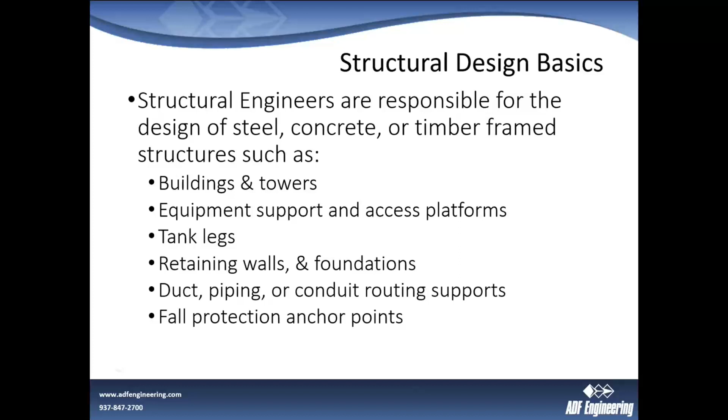So when we start a project, the first thing we really need to do is determine what kind of load we're going to be dealing with and how much. A lot of the projects we do, and a lot of the stuff we see on sites, is related to a process upgrade. So we will have a lot of ideas of what the equipment needs to be, what the changes need to be done there, and we will have to look at it in terms of what does all this weigh, how much space is this going to take up.

And that kind of sets our structural basis for design. So we look at things like what building code we're dealing with. We look at the site-specific information, such as the geological stuff, if we have foundations in question, and we'll look at what the existing buildings are, if there are any. I'll kind of touch on that more later. And then sometimes there's stuff like cost schedule restrictions we run into a lot, and even some limitations on height, and depending on the area the building is in, there can be other things there.

So we have to take that into account, and then we'll generate that preliminary design. A lot of times that goes through gate reviews or costing phases, and then while we're receiving the final equipment information, and once that all comes in and those layouts are approved, we'll finalize that design and issue it.

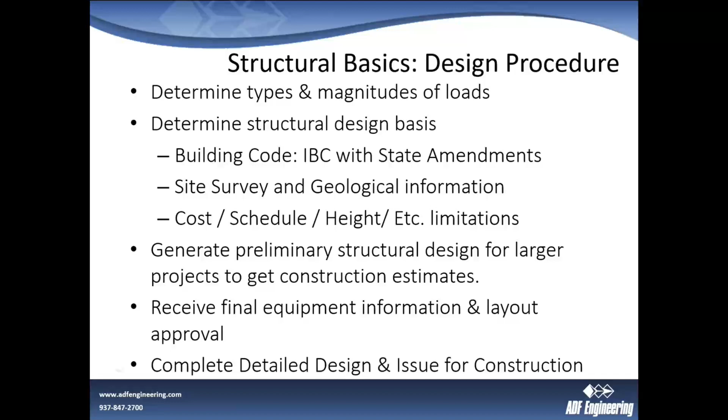We're going into the meat of the presentation today. I'm going to be covering a lot about terminology and how that affects or comes into play with drawings, and what a lot of these words you hear when talking to a structural engineer might not quite make sense, or you might not fully understand what they're referring to. We'll try to cover all that.

When we talk about a load and what we're trying to support with the structure, there's different types. Dead load is our most common. That's the weight of the structure itself, and any permanent weight that's going to be in that structure, such as equipment, or any kind of heavy furniture, or anything that's not transient. Live loading is the second most common, and that is the weight of people, storage, product weight inside of buildings.

So those are the loads that kind of come and go. You might have one person walking around, you might have 50, but we make an assumption based on a lot of codes for what we're designing each thing for. It depends on what the structure is specifically, and we'll look at that in a bit on what we assume that live load is.

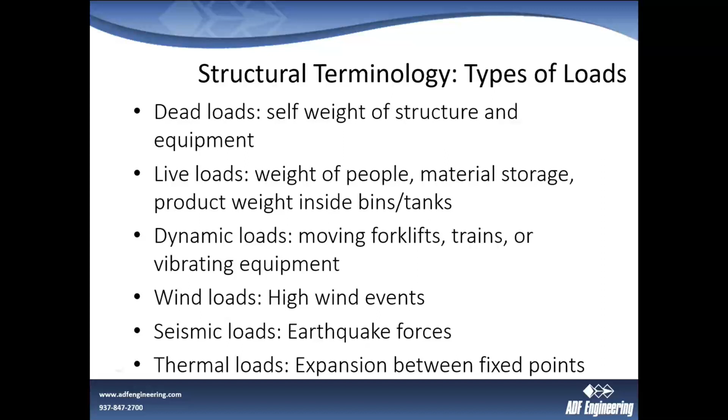And then the last one is thermal loading, and a lot of this is if we have a big piece of equipment or piping that has a big thermal temperature change, they can expand, and if we aren't careful with our supports of those pieces, the expansion can do damage to itself or to the structure surrounding it. So we try to leave those changes or that thermal growth free to move.

So how do these loads show up on the drawing? Usually you're going to see them in one of two ways. On the cover page, there's going to be a design data kind of information dump, as it were. You see here, this is an example of one of our projects. We provide both the live load. What is that? It differs depending on what area you're in.

A lot of times this will be required by ASCE 7-10 or 7-16 or whatever year version that is. Most industrial floors are somewhere between 60 PSF for a catwalk, walkway, or a light floor. 100 pounds per square foot is common, all the way up to maybe 200 if it's being used for storage. Roofs are much lighter, and ground floor is heavier, usually like a slab. This information is important both when you're looking at and trying to think about making changes to a structure, or if you're having another project come in, you want to make sure you keep that information.

One of the things I'm going to be bringing up quite often in this presentation is that we don't see very often people keeping their structural drawings. So you have a plant that's built, and a lot of times they'll keep maybe the general arrangement equipment layouts, but they might not keep the structural drawings. Those are always going to be helpful, not only for the structural engineer coming in to look at any modifications, but also for engineers working on site to understand what the structure was designed for and what the intents and purposes were.

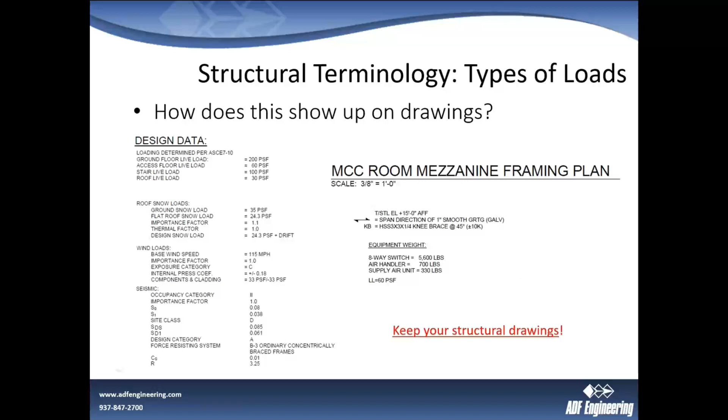Also shown is the equipment weight in a particular view. If you have a platform supporting several pieces of equipment, it's nice to have that information there. That way, if an upgrade is occurring and we know the weight of the new equipment, or maybe we don't know the weight of the old, we can at least know what was assumed for the design of the floor. If the new equipment is significantly heavier, we know we should have a structural engineer come evaluate that.

When we get into these drawings, we have different types of views, and it's not always clear what they mean. The first is a plan view, the most common type. It's a top-down view from above showing all the horizontal framing. A lot of times we'll also include equipment locations and floor openings. It looks something like this as an example.

You'll see column lines as a reference in the building running north to south and left to right. Usually north is up in these views, but not necessarily. You'll have both orthogonal directions with column lines shown, and those serve as a good reference point for contractors to find where things are supposed to go.

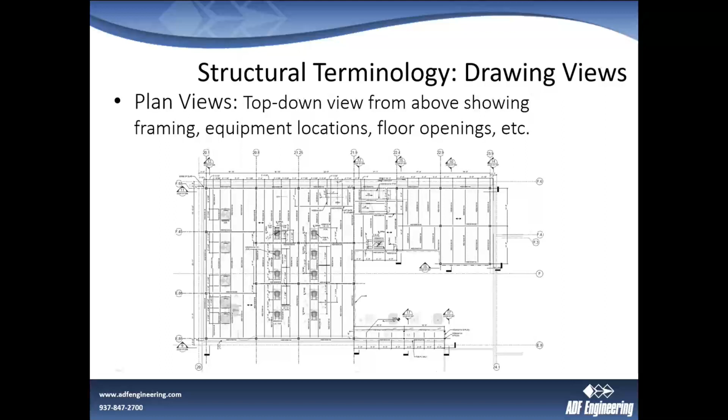We also have elevation or section views, which are similar — a side view showing additional information. Here we have elevation views, although they're called out as sections, but this is more of an elevation view showing a partial to full view of the entire structure height. So for a full building, the elevation view is like standing outside looking at one wall, showing what you would see.

A section view is usually a smaller cut. This one was an indoor platform, so it's just a section cut — a side view, generally taken from a plan view, that gives more frame of reference by providing a secondary look at an object we're trying to show on a drawing.

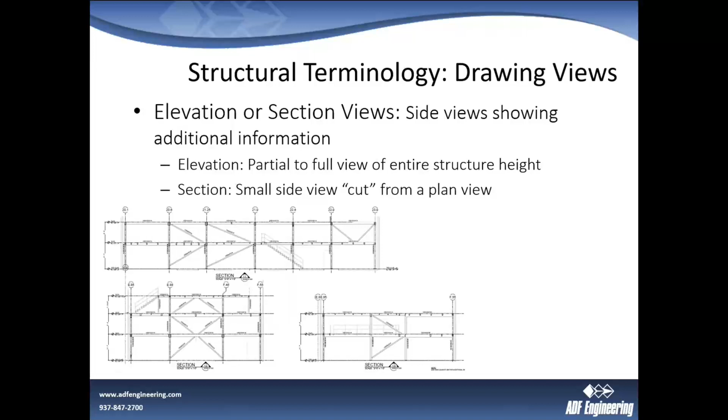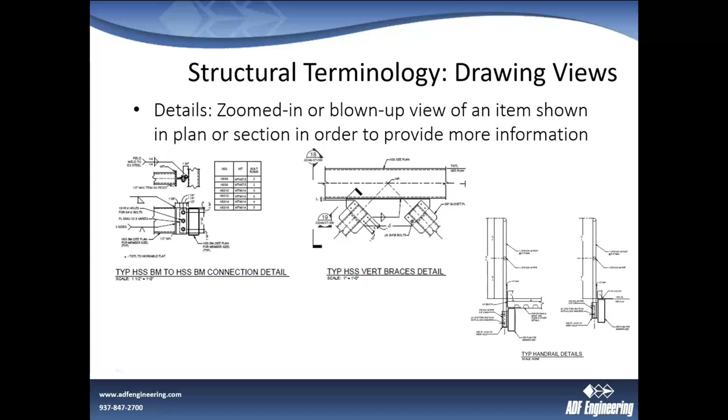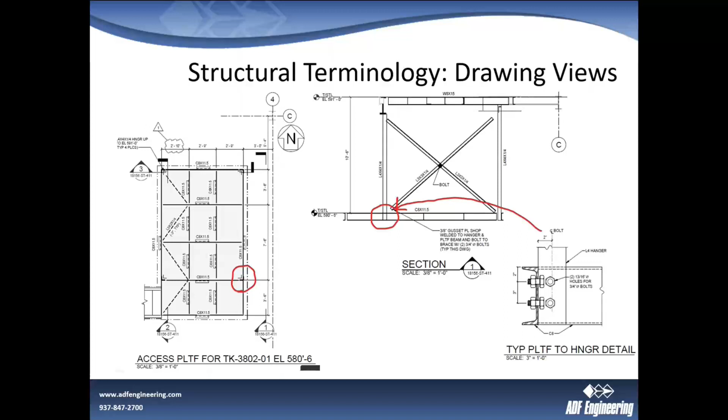It all ties together, and there are often references on these drawings. You can see the call-outs for a section — if it's not on the same page, the number matches to a section view number, and the drawing number where that section can be found is usually shown on the detail. Here it's sheet 411, and in this case both views are on the same sheet, so they were referenced together.

Now we get into kind of terminology with steel and the shapes that those are. A lot of people, and we hear it, always say I-beams, and that's a common way to call it, because they do in fact look like I's, the most common ones you see.

But in reality, the way those are designated are usually W shapes. The W stands for wide flange shape, the flange being the top and bottom horizontal sections, and the vertical piece is what we call the web. So you can see here there's a couple different I shapes shown - there's W's, S's you might see sometimes too, and a couple other ones called H's that are used for steel piles and things like that.

The rest of the shapes are a little bit more intuitive. A C shape is a channel shape and looks like a C. An angle is designated with an L, and it looks like an L. WT is a T shape, or ST - those are made from cutting a W or an S shape in half and getting the T shape from that. And then you have pipe sections - there's process pipe, but there's also structural pipe shapes, square HSS tubing or rectangular, and then bars and plates.

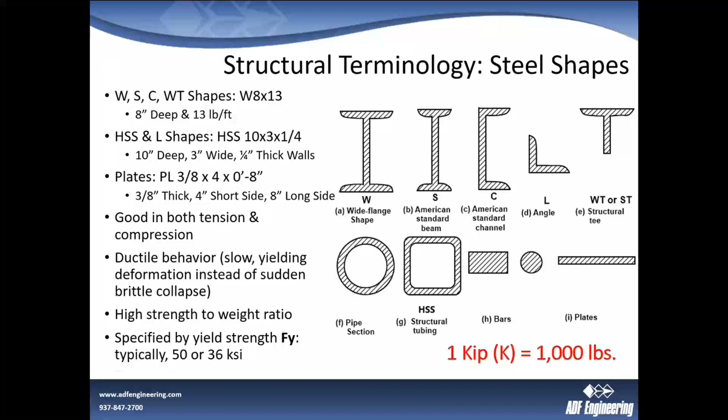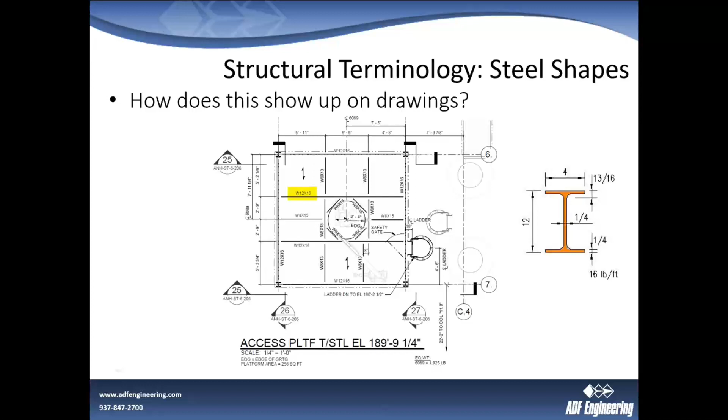And we know that a 12 by 16 has a 4-inch flange and a wide flange, and a quarter-inch thick web and flange, so we can measure those up and be able to identify this. But again, it's always better, if it's an existing beam, to have the drawing so we're sure.

Concrete is another one, obviously, that we're using quite a bit. A lot of people too sometimes don't understand the difference between cement and concrete. Cement is an ingredient in concrete. Concrete is made up of cement, an aggregate such as rock - typically rock and sand - and then water. So those ingredients make up concrete. Cement on its own is just a powder.

When you add all those together, you actually get a chemical reaction. Cement or concrete doesn't dry, technically, it hardens. So it keeps hardening for quite a long time, mostly up to about 28 days. It's very strong in compression.

Usually, when you see concrete specified on drawings, it's by its strength, called F prime C, and that's mostly between 2,500 and 5,000 psi. So you'll see that concrete is weak in...

The problem with concrete is that it's very strong in compression but very weak in tension. So to counteract this, we introduce rebar, steel rebar, which we know is very strong in tension as well. That helps provide strength to the concrete members in the tension areas. We put it in there and it keeps everything locked together. We put enough reinforcement to keep the concrete from cracking and also to resist any kind of bending.

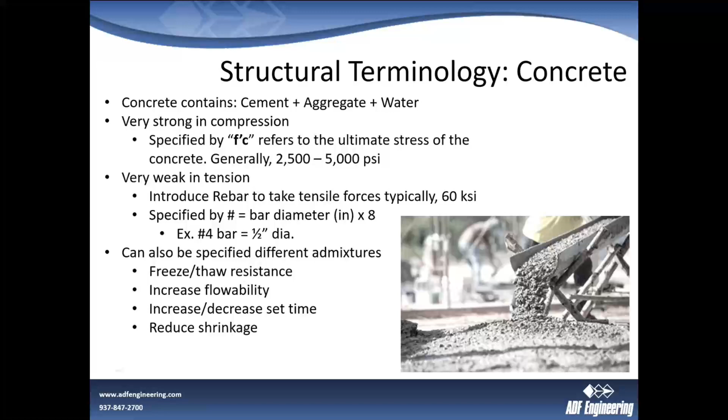We'll send you guys out an abbreviations list for the drawings too - I think that'll be helpful, at the end or in an email later, to explain a lot of these abbreviations you see. But EW is each way, T and B is top and bottom. So you have number 5 bars going at 12-inch spacing each direction, in both the top part of the slab and the bottom part of the slab. That's what that's telling you.

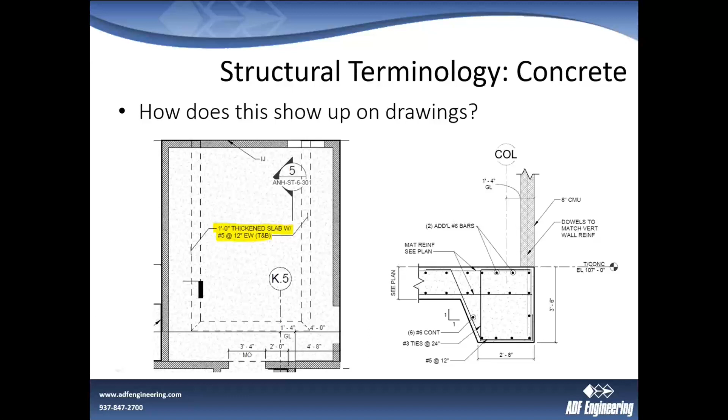So for this first one, going over what we talked about: an operator standing on an elevated platform would be considered as what kind of loading? Dead, live, seismic, or dynamic? I'll give you a beat to think about that one. So that's going to be a live load, right? That's not a permanent load - that person's not there all the time. So we would consider them as a live load, and they're working.

So once we have all these materials that we use, the steel and the concrete, now we have to figure out the load path. We talked about how do we design for these loads that we're going to be looking at, and how do we get them through the structure and essentially into the ground. A lot of the terminology that people use here, hopefully this slide helps clear up.

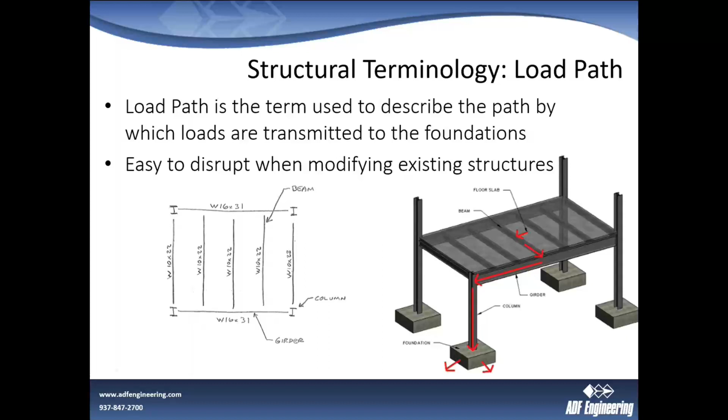The other loads that we're dealing with, besides the vertical loads, is the lateral loads we talked about as far as wind and seismic going. So we have what we call bracing that provides that stability. This limits the drift. So it's not just active loading, it's also preventing the building from racking.

You think of, if you have all pinned connections in the building, it swings side to side, nobody wants that. So it's not just a strength issue, it's also what we call a serviceability issue. If you're on the top floor of a large tower and it sways quite a bit, that's obviously going to be very uncomfortable for the worker, and we want to try to avoid that. So there's a couple different ways we can do bracing.

That's probably what you'll see most in plants. Kind of depending on what equipment or what use through that bay is needed, we'll adjust our bracing accordingly. If there is nothing going through there, we got lots of room, we'll put in an X brace, which is probably the most economical. This is because each of the two diagonals only takes tension, so you don't have to worry about it buckling at a long length.

Think of it like when you see pre-engineered metal buildings. Sometimes you see cables being used in this way. It's like a rope. It's very good in tension, but in compression, it'll just fold in on itself. But this allows you to use much smaller sections of bracing. Unfortunately, it's one of those situations where if you want to come in later and remove one, you can't just remove one and leave the other, because the other one won't be able to take the load from the other direction if the wind were to reverse.

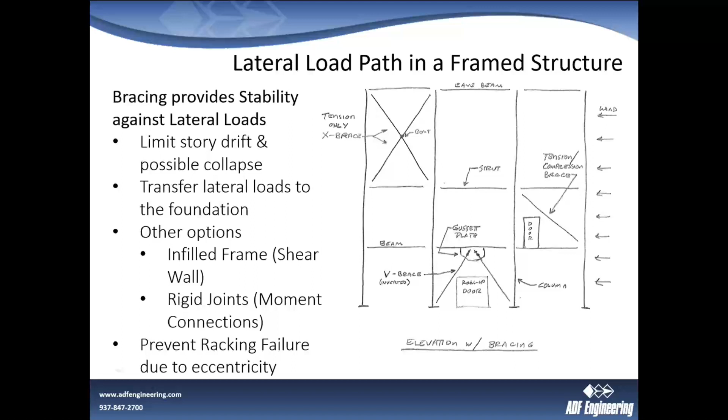So once we get through the steel structure, we come into the foundations. The foundations are the underlying portion of the structure that's supporting the building, transferring those loads to the underneath. For these, we always rely on the information provided by the geotech, the soil boring. So that's why a lot of times if you're dealing with structural engineers, we'll ask if there's a soils report on the site.

And that way we can know if we don't have one. We always like to get one, and we can always help with that too, kind of identifying for the geotech what we need and what we're planning on doing design-wise. That gives them a lot of help on being able to recommend what design values that we should be using.

If it's pretty good soil, we'll be able to do a shallow footing. Spread footings are just square footings that spread the load out from a single column, or a mat foundation which may have multiple columns, or a piece of equipment like a tank, and that just sits fairly shallow in the earth, and nothing more is needed.

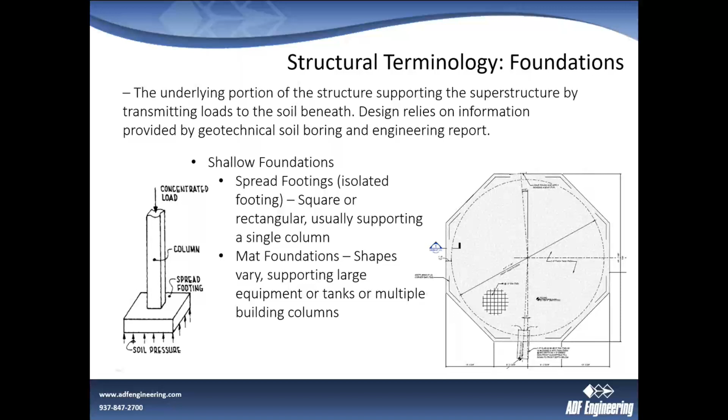Deep foundations, we're going to have piles that go deeper to either better soil or potentially even bedrock. We usually have to use those if the top couple, 10 or 12 feet of soil out there is, according to the geotech, very low strength.

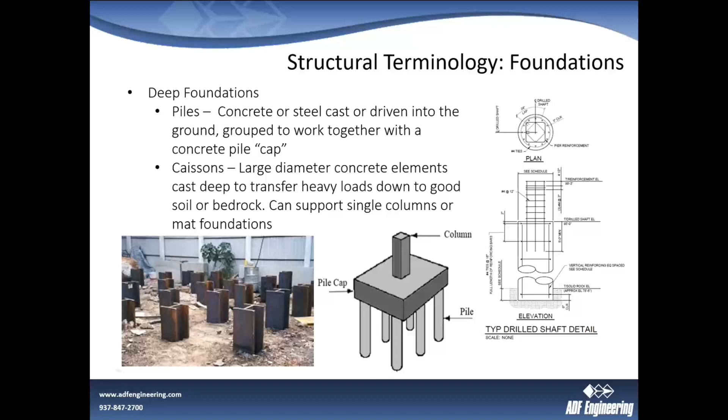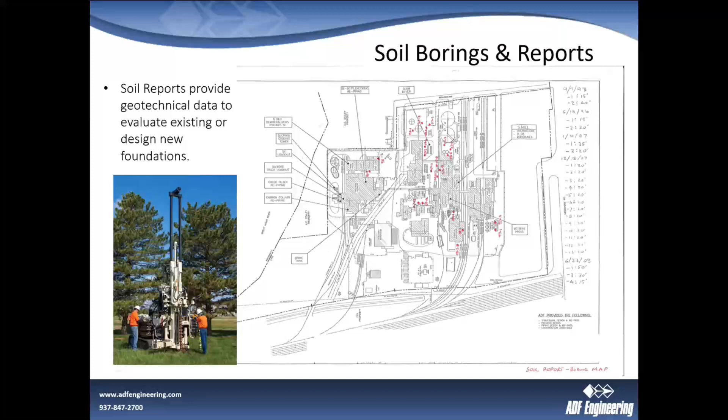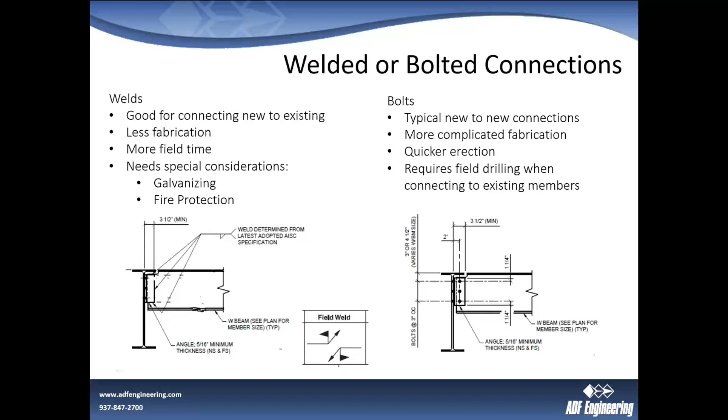I think it'd be helpful for you guys, when looking at these drawings, if you see that symbol and know that field welding is going to be a problem, to talk to your engineer sooner rather than later and maybe try to come up with a bolted alternative.

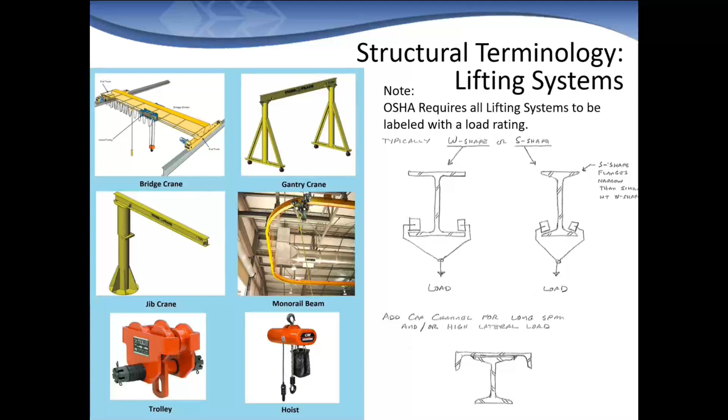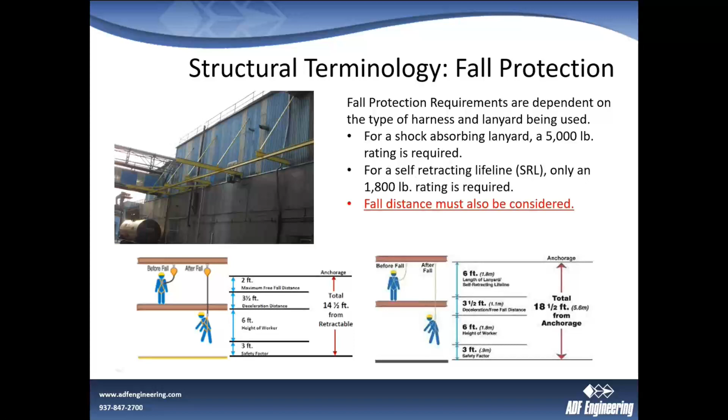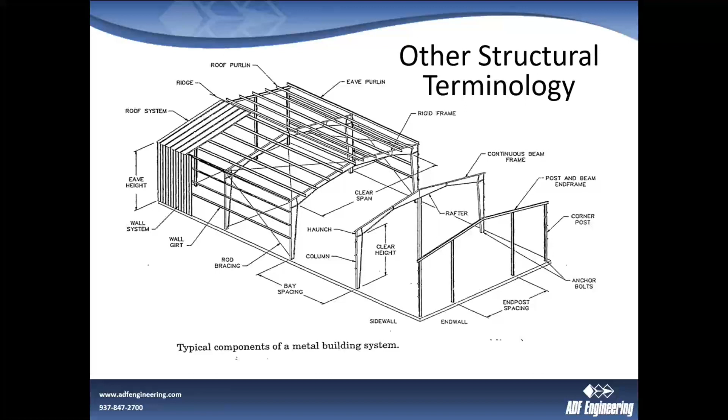All right, so a quick quiz. It's okay to remove one brace of an X brace configuration if the other side is still able to be left in place. So think about that one.

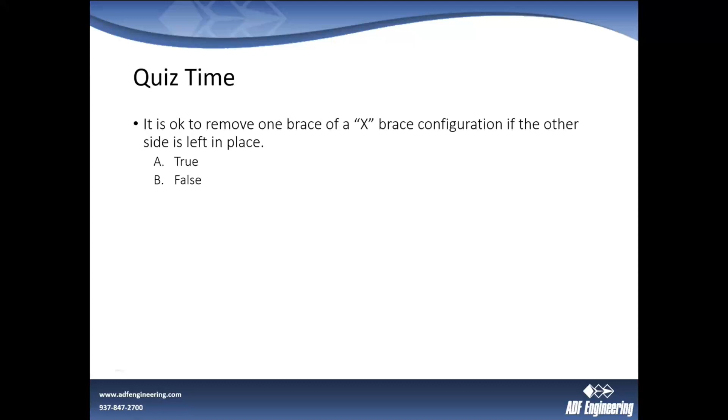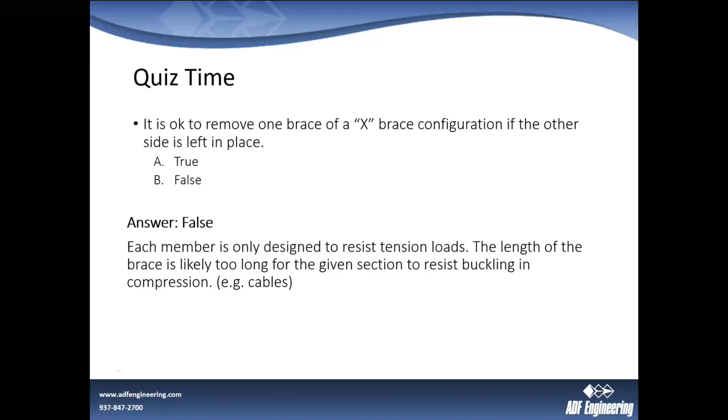And that is false. Those are only each designed to take tension loads. Usually, if it's designed as an X brace, the length is going to be too long for the given section to resist buckling in compression, like a cable would.

Brownfield projects is a big word we throw around here. It's the majority of the work that we deal with, and I think a lot of you guys deal with as well, in terms of making changes to an existing site. These are always challenging in their own right. Everyone's a little bit different, so that's what makes it exciting. Each one has its own limitations, such as shutdowns and timing, and potentials for unsafe chemicals and explosion problems. So, a good reason to keep your structural drawings—if you're going to be modifying something in the future, it's always better to have that.

A little bit about reinforcing. When we're dealing with these brownfield structures, we potentially have to reinforce something. If you have a floor and you're going to increase the weight on it substantially, there's options to replace the beams. But if it's maybe one or two under a specific piece of equipment, and it'd be much more of a hassle to take the beam out and replace it with something else, we'll reinforce it with more steel pieces.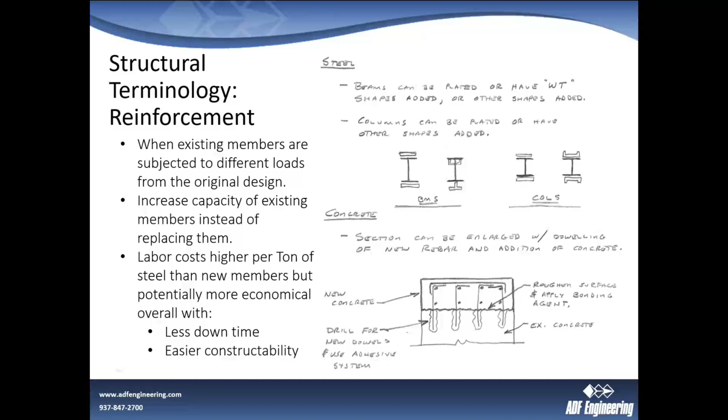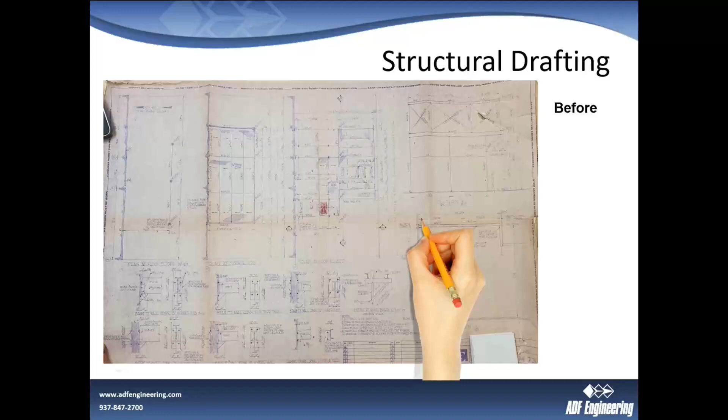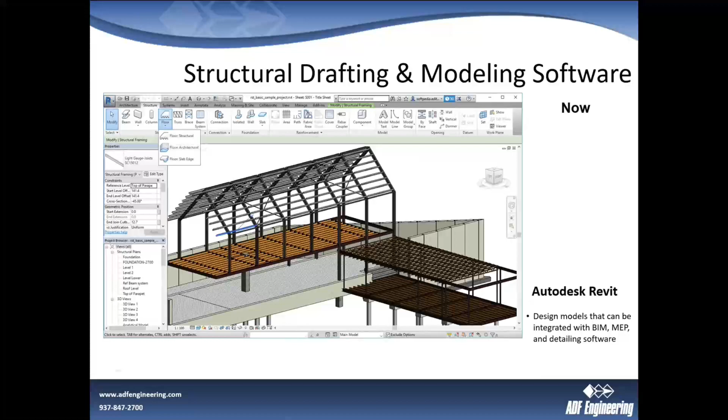When we're doing these brownfield projects, previously it was all tape measures and eyeballs. Now we're working with laser scanning, so you'll hear that sometimes with drones and tripods and fancy cameras. Before, everything was hand drawn, and now everything's done with modeling software. We use Autodesk Revit, but there's plenty of others out there, and that gives you the ability to model some of this existing and new stuff. Looks like this—gets pretty fancy.

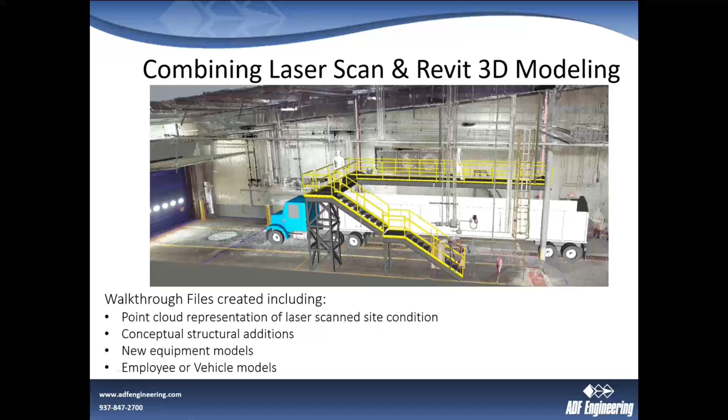When we take that laser scan, we get a point cloud—a good visual of the existing site. Then when we want to add in new steel or equipment or whatever it is, we can look at it together. This is much more accurate than previously with a tape measure, to identify any potential interferences and things like that. So it's a tool we use a lot.

Once all that design is done, we get to making the drawings. We have design drawings—the structural engineer will be providing you design drawings. These are to show the intent of the engineer, and when we issue them, that's kind of the start of the construction phase.

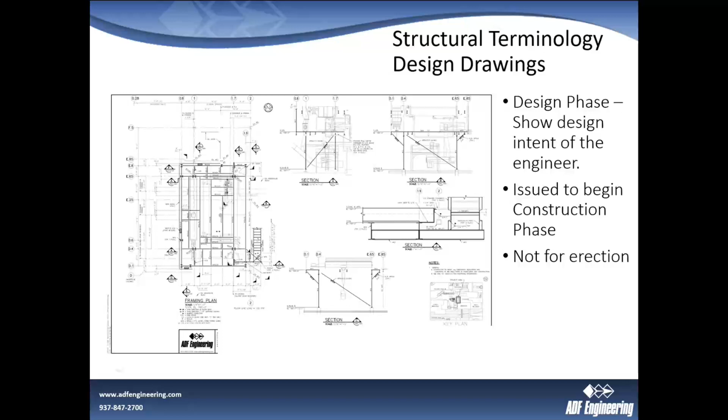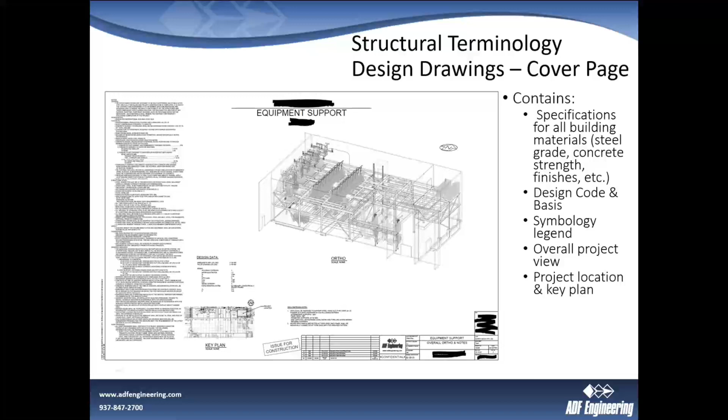A lot of times they'll have a cover page. This is where you'll find your specifications for building materials, steel grades that we talked about, your concrete strength, your finishes, the design basis, maybe a legend for your symbology, an overall view of the project, and then a key plan. If it's a small platform, that key plan is really helpful to identify to your contractor where this is, maybe in a quite large facility.

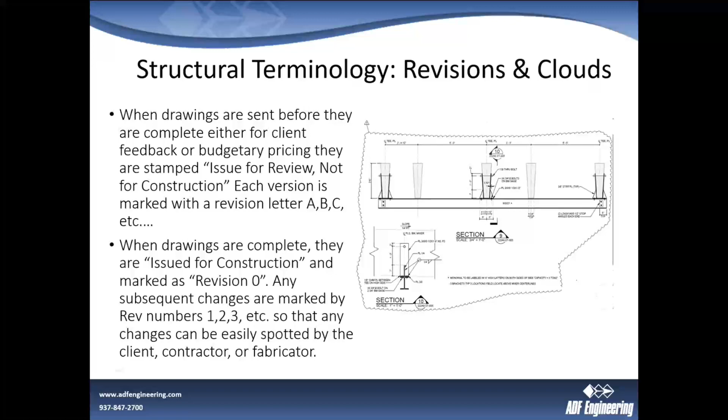As those design drawings are sent out for feedback and pricing, usually they're stamped for review if they're not complete yet—not for construction. These revisions are each labeled with a letter, A, B, C, etc. Once they are complete, we'll issue for construction as Rev 0, and any changes after that are marked with a number and clouded so the changes can easily be spotted.

What comes from that will be those drawings are sent to the fabricator or detailer, and they'll end up creating shop drawings. These are more of what the contractor uses out in the field to assemble everything. They'll have assembly sheets showing where each piece is marked, giving the fabricator a way to know how each beam is specifically cut and has a piece mark. Then there's an erection sheet the contractor uses to know where each piece goes according to those plans. It's kind of like a puzzle with a legend, showing where each piece goes.

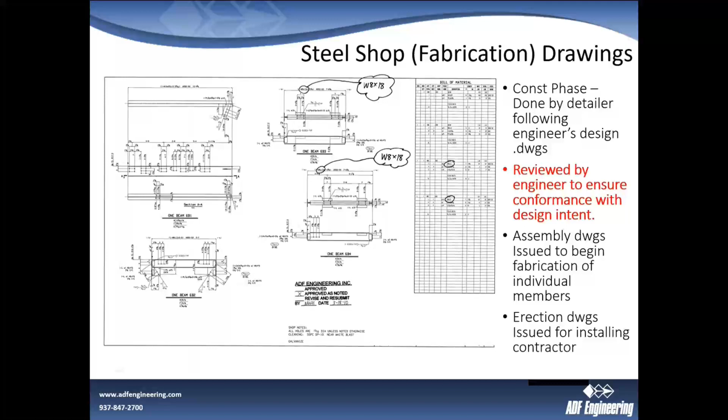We talked a little bit about construction phase support. It's always good to have the structural engineer involved throughout both design and construction, to mitigate last minute changes or revisions that have to happen because site conditions may have changed or equipment was different. We can also provide feedback to contractors if they want material substitutions and stuff like that.

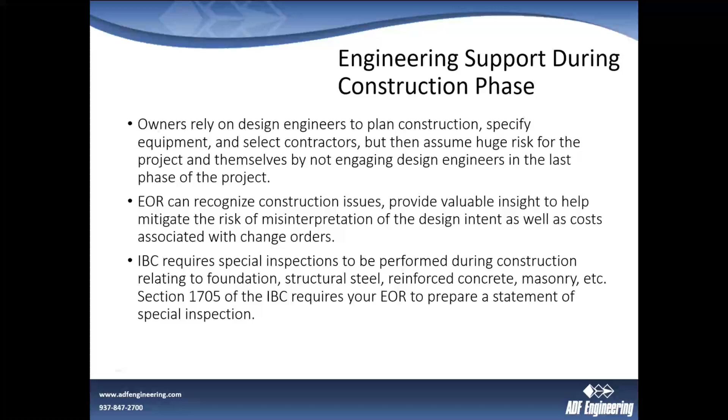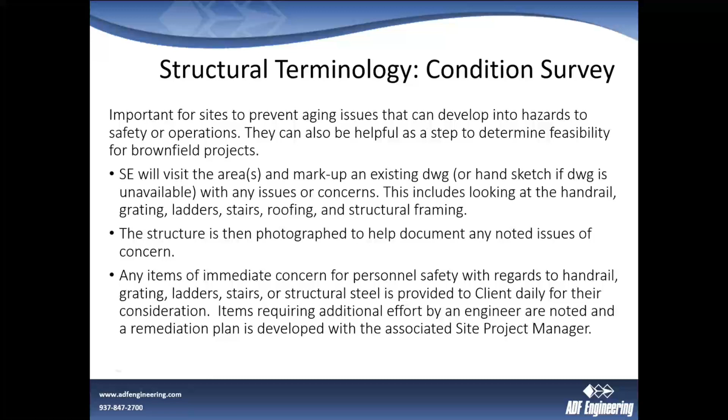I have a little bit here about condition surveys, I'll skip through it pretty quick. It's something we can do if there's not necessarily a project happening, but maybe it's an older site that looks like it needs some kind of upkeep. We'll walk it down and see some stuff like this.

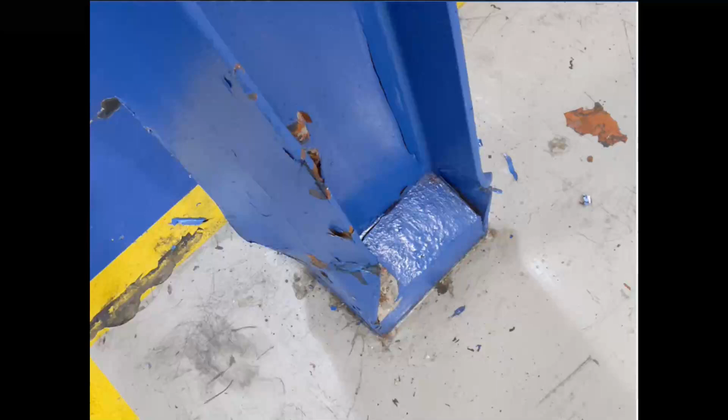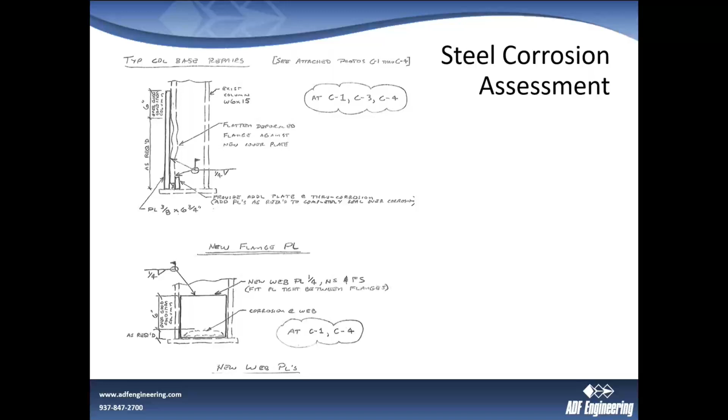A lot of you guys have probably seen things like this around your sites, where you have steel that looks like it's not really hanging on by anything anymore, or maybe had an oops and somebody hit it with a fork truck or something like that. We can take a look at those and provide guidelines on if it needs to be resolved immediately, or if it needs further engineering assistance. If it does, we can also have the structural engineer provide details like this to help with that.

All right, last one. Is it all right for a contractor or fabricator to make changes to the structural design? But only if there are good contractors, or if there are little changes, or if they've been submitted to and approved by the engineer, or never.

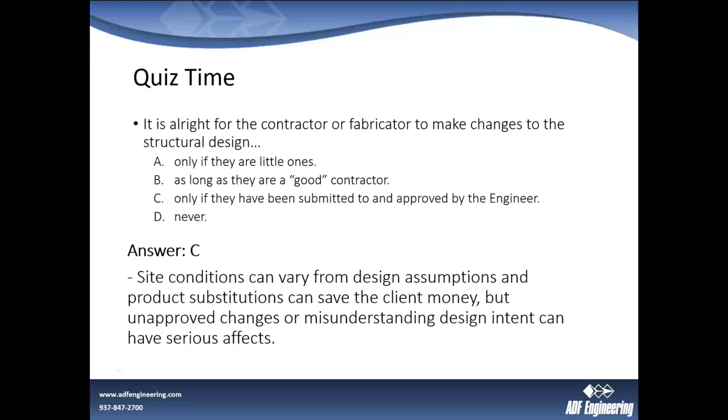So the answer to this is C. Site conditions can vary, we understand that. Product substitutions can save client money, but any unapproved changes or misunderstanding of the design can have serious effects. A lot of times this comes into, can we use a different kind of decking, different kind of anchors, different kind of paint. That's all fine, we'll look at that.

But one I did want to mention, this little case study to wrap us up, is what happens when there is a breakdown in communication between the fabricators and the engineer. This is the Hyatt walkway collapse, which is kind of a famous situation for structural engineers, we always hear about this. Built in 1978, failed about 3 years later.

It was two large pedestrian bridges, one above each other, stacked above each other. During a party at the hotel, both bridges collapsed, killing about 114 people and injuring a lot more, as you can see. It was one of the deadliest non-deliberate structural failures in American history.

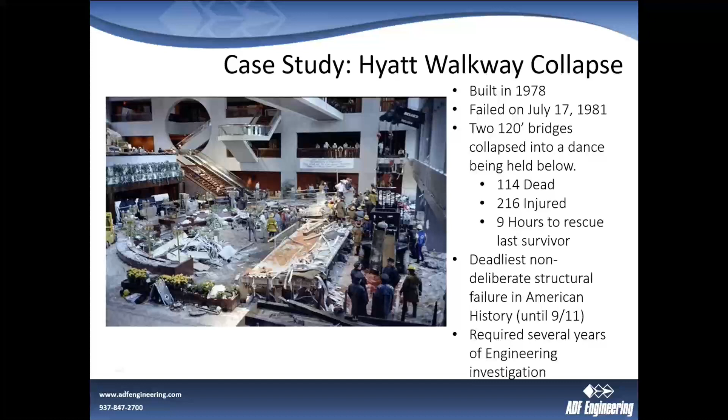But it is an example of the importance of accuracy and detail, both showing the intent from the engineer and the shop drawing review process, particularly regarding these types of revisions, stuff like that.

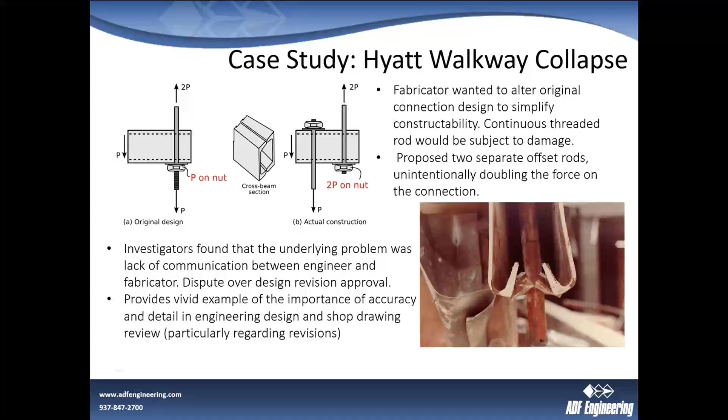So in summary, structural engineers, we design these structures to be safe and economical, but we have to be able to do that. We need to predict the forces that could be present and fully understand the structure. That includes always asking for all the equipment information in our cases, and also what kind of existing drawings and information we have on the existing structure, which is another reason to keep your structural drawings. So I think that's the end of it.